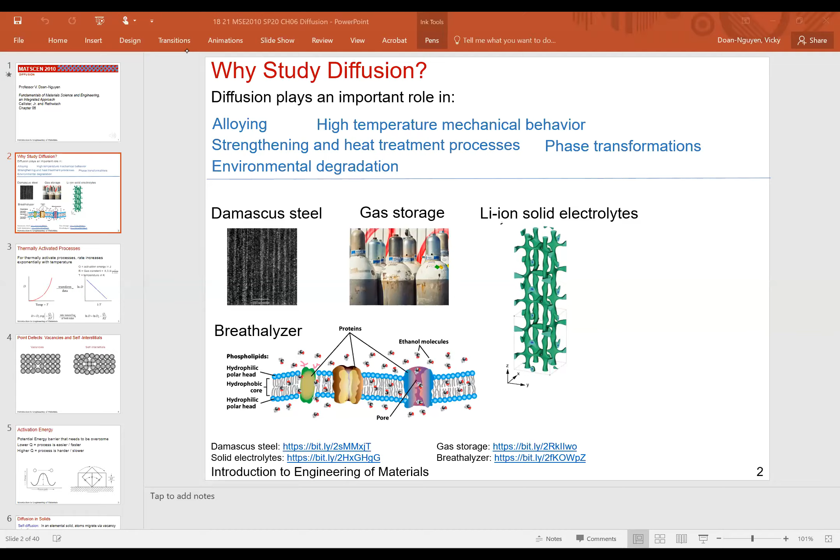Let's see, I'm going to duplicate my display. I'm not going to belabor the point and go through what Janet already talked about when she covered my lecture last week. I'll just go over the highlights, and then we'll do some practice problems together and manipulate the solution to Fick's second law as well as Fick's first law by solving a set of equations. I hope it's pretty abundantly clear that diffusion is basically in everything, in all materials processes that you will encounter as whatever engineer you are or will become.

Clearly bio applications are significant, there's a lot to say about breathalyzers and how accurate they are, but that's certainly a chemical process in terms of diffusion of molecules. Diffusion of gas molecules is also extremely important for everything we do, because we compress gas and also release gas outside, and that could have a major impact if, say, you're parked next to a building that has a lot of nitrogen from liquid nitrogen dewars outside. All that nitrogen coming out, if you park your bicycle with a metal frame for a long period of time, what do you think will happen when that metal comes in contact with all that nitrogen coming out?

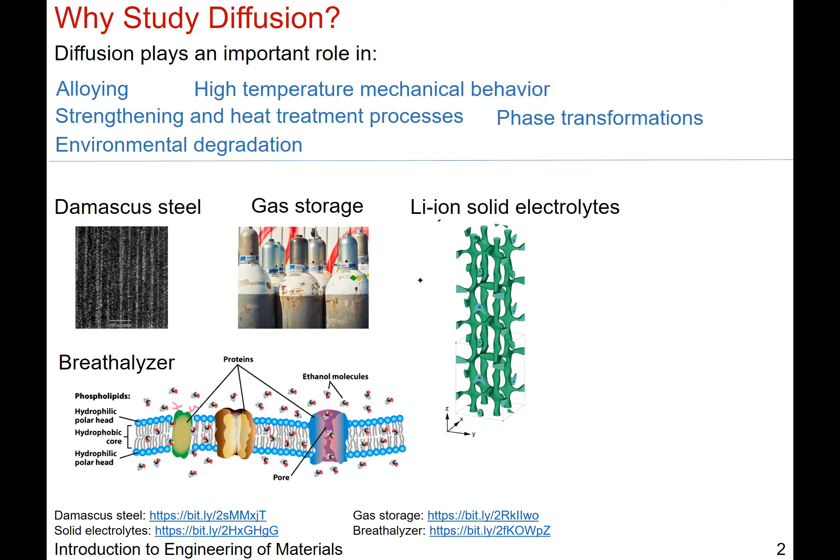So I am going to go to Fick's second law since a lot of you had concerns about that.

All right, this is the solution to Fick's second law. Basically, we're just saying we're not at steady state yet. Not enough time has gone by, and also we have an infinite solid. What that means is at this interface here, you have some concentration, okay? The CS, this concentration at the surface. And in this particular scenario, our boundary conditions for solving the partial differential equation is that you have some concentration at the surface that's going to be constant.

And you keep feeding the material, right? Your diffusive species, you keep feeding it so that your concentration at the surface is constant. So that's some CS. Your C-naught is the baseline concentration in your material.

So if you were a process engineer at Intel and you have a silicon wafer, and your job is to diffuse and control the process where you introduce phosphorus atoms into the silicon to make it an N-type semiconductor, right? If you keep feeding that concentration where the surface is some known concentration of phosphorus, that's when you would use Fick's second law for. If you were a process engineer and you just introduce phosphorus and then let go, take the phosphorus source away, and then you don't do anything, you just wait until the phosphorus diffuses into the silicon wafer, you don't use Fick's second law for this because the surface concentration is not the same, right?

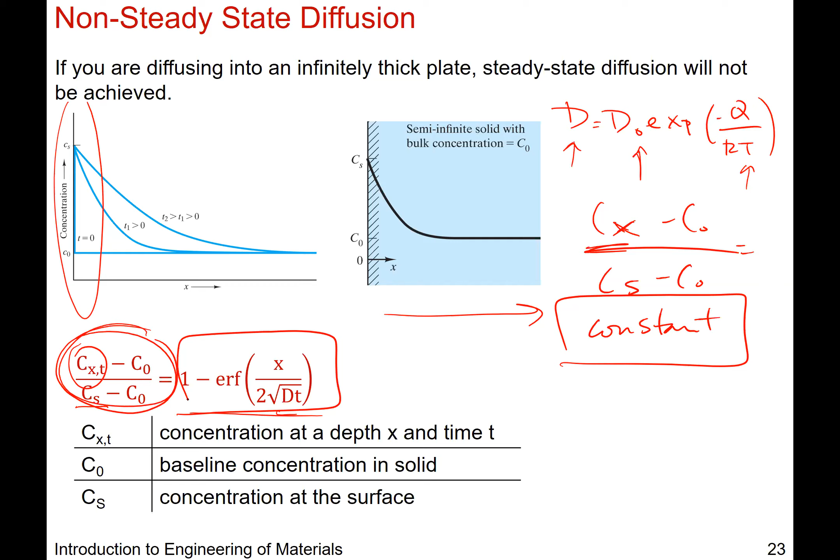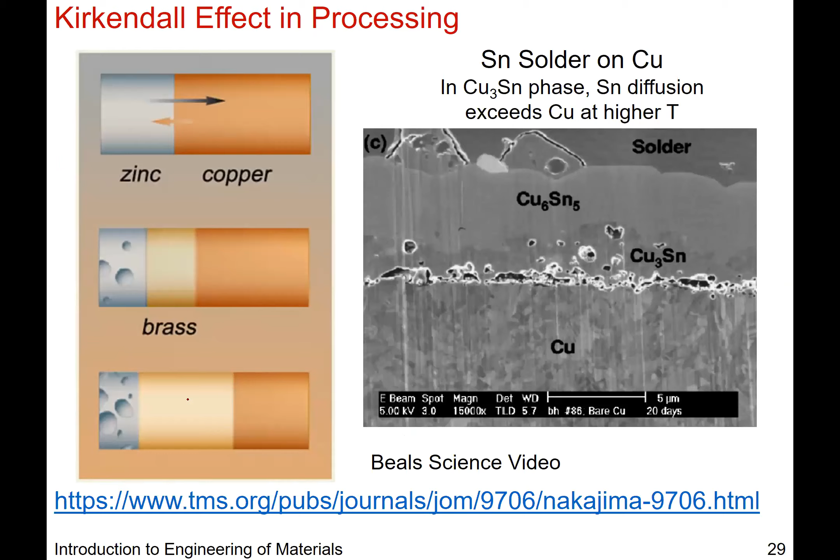So you asked me, what are those instances and how do I manipulate these equations? So let's get to that, and that might answer the question that Megan had. So let's see, okay, so this was the example - I'll get back to that. I'll also get back to the Kirkendall effect after I go through some examples. Okay, so here we go.

Here's the processing example. So instead of carburization, now you're putting copper into a bar of aluminum. We're assuming a semi-infinite source of aluminum, and copper at the initial concentration is going to be 0 because we haven't diffused any copper into aluminum yet. It says it took you 10 hours at 600 C to achieve some desired CX. So already you don't know what CX is, but you want to know how many hours it would take to get the same concentration if you lower the temperature by 100 degrees, going from 600 to 500.

So you're given a time, a temperature, and some diffusivity value, so you know you're going to have to use the diffusivity values given here. Just a reminder, rewriting the solution - your known concentration at the beginning in this semi-infinite slab is C naught, so that's just going to be 0, but it doesn't really matter because we don't even know what CX is anyway. And you're introducing copper at the surface, CS, and it's diffusing into aluminum.

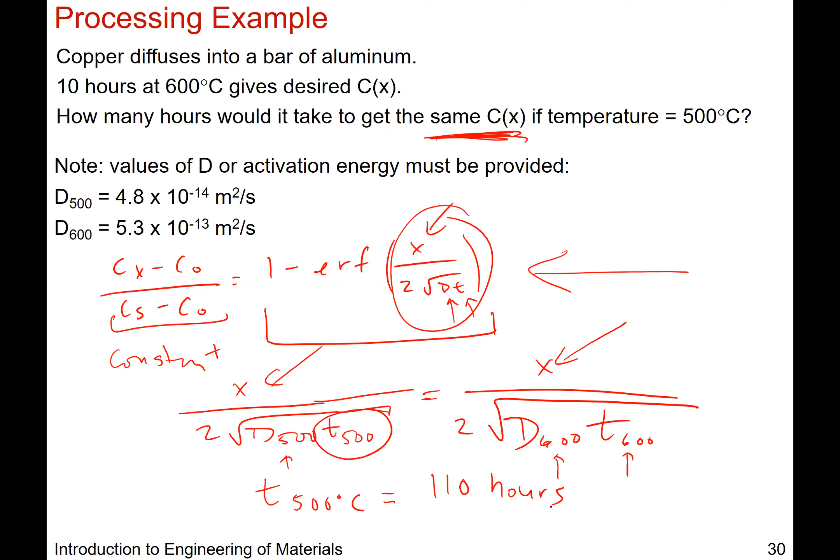Let me give you another example on how to manipulate the solution to Fick's second law by using the error function, but not solving for it explicitly. Okay, so let's see.

If you had something like this, where you have some sample - now we're back to carburization - it says that your sample of steel has been carburized at 930 degrees Celsius for 10 hours, and it has reached a depth of 0.04 centimeters. Now, if you want to continue this process so that your material is carburized out to 0.08 centimeters, or 2x the depth into your block of material, how much longer is it going to take you?

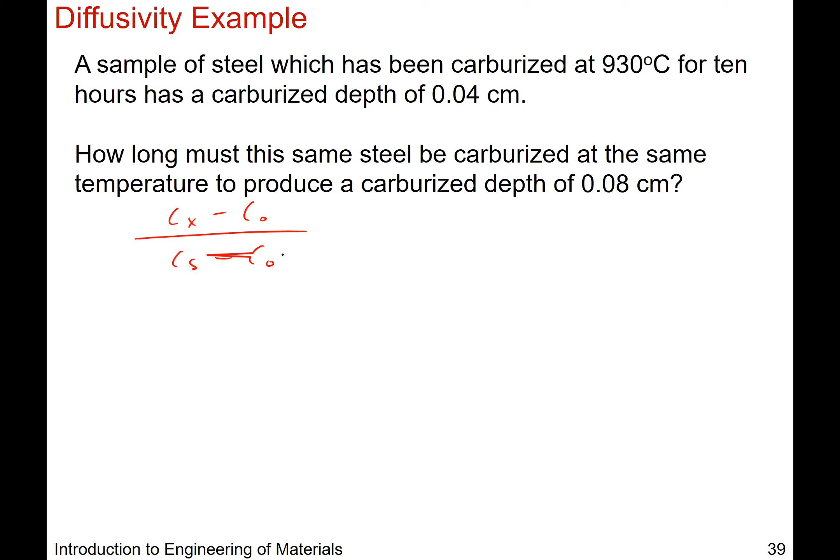Clearly, it's not going to be 2x because it's not a linear process, right? So now you can manipulate the solution to Fick's second law again. So you know that... once again, you keep on writing the solution.

It really wants to show you that video of the Kirkendall effect.

So we have that, and we're saying that our X's are changing. The depth at which we're carburizing this material is changing. So X is changing.

We're manipulating this again. X is changing, but is diffusivity going to change? No, we're at the same temperature. We're at 930 C, diffusivity is not changing, right? And why wouldn't diffusivity change? Well, right, what I was getting at is it's not changing because you're at the same temperature.

This is the equation that makes my statement valid, okay, for the most part. There's always an asterisk, but for the sake of this example, diffusivity is not changing.

And so if that's the case, then what we're really solving for is how much longer T2 is going to take if X is going to be 2X. So our diffusivity values cancel out because they're not changing, and the 2's cancel out too. We're solving for T2, the amount of time for 0.08, our X2 is 0.08 centimeters.

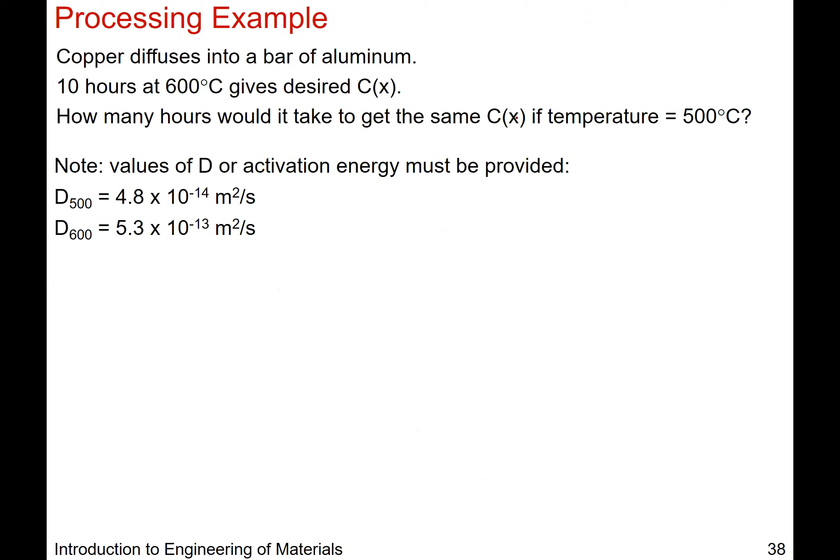Oh, that was a completely different example. This one was specific for copper going into aluminum. This is something going into steel—sorry, carbon going into steel. So it's a different example, a different case study. I could have used the same material, but I switched up the material case.

How did I get 4T? That's a great question—oh sorry, there should be a square root here. So square root of T1 was in there. Thank you for catching that typo. This is square root of T1, and this is also square root of T1, so I forgot to square it when solving for T2.

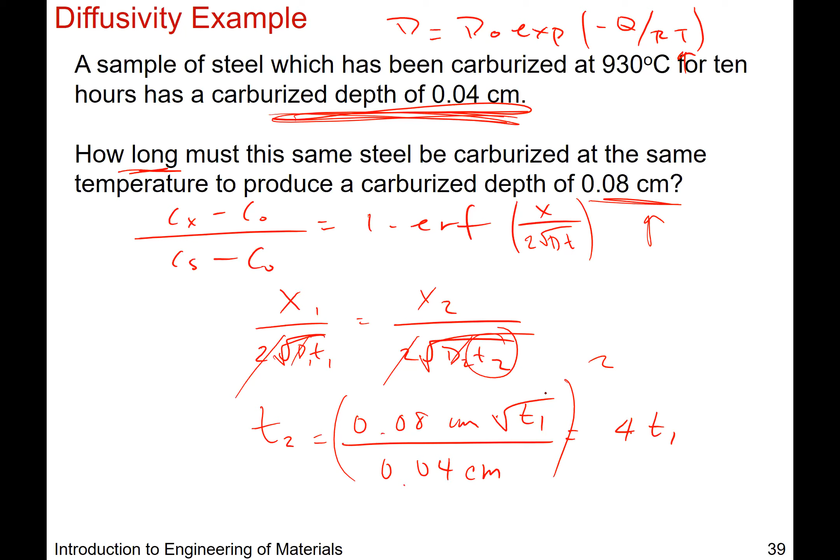Let's see if there's going to be another helpful example. Yes, there is. So when you're given an equation with some known conditions but some unknowns—like your diffusivity is unknown at a second temperature, or your rate is unknown at a second temperature, or you're solving for activation energy—you need enough information to solve for the new condition, and typically that requires a system of equations.

If you don't know the activation energy, you could measure the rate of something. In this example, I have the rate of oxidation for a material, and the rate is just some Arrhenius type equation: rate equals some pre-exponential factor C times e to the negative Q over RT. This is something we've been harping on, and you've also seen it for diffusivity, with some pre-exponential D naught.

So it's thermally activated. If you're given that the oxidation rate is 1.05 times 10 to the negative 8 kilograms per meter to the fourth per second at a certain temperature, and you're given another rate at a different temperature, how do you solve for Q? You have to solve a system of equations. You don't know the pre-factor—that wasn't given—and you don't know Q either.

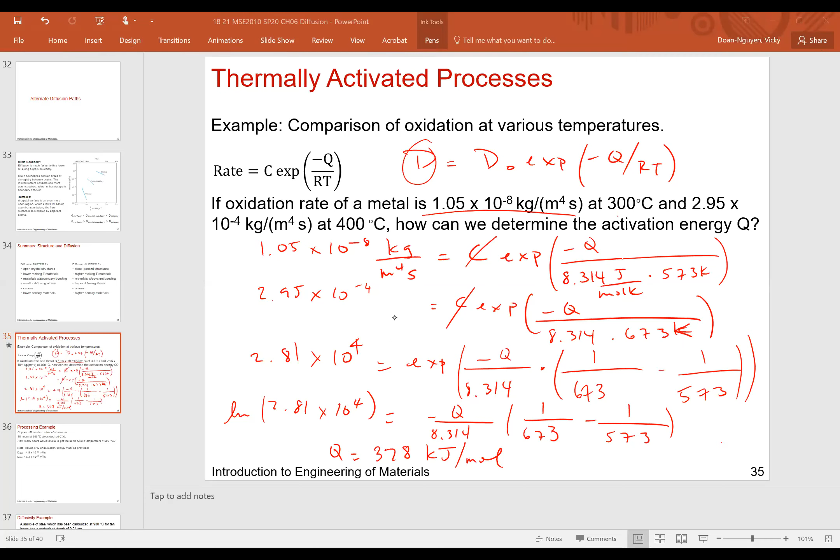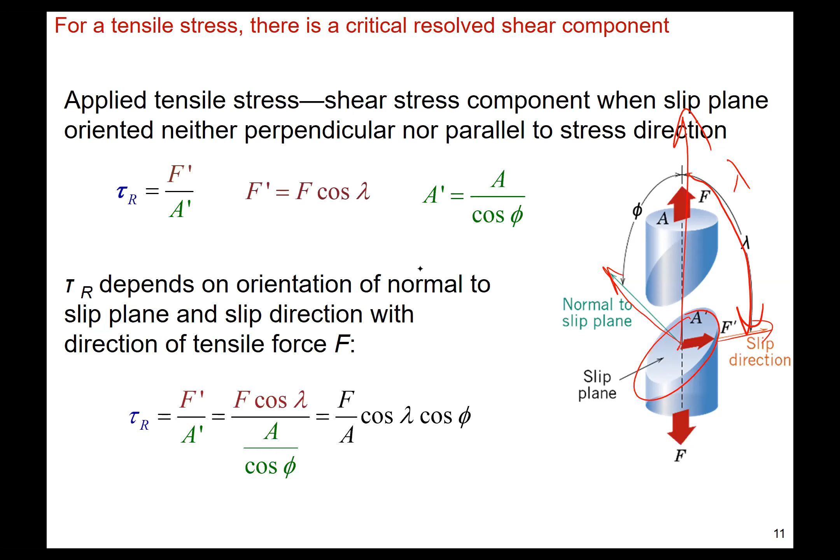So the slip direction—if you have a single crystal and apply stress at a certain crystallographic direction—what is the angle at which slip is going to be preferred? That angle is when the Schmid factor is maximum, so cosine lambda times cosine phi is maximum. That's going to be the preferred slip direction, as shown here.

So we worked out that problem. Now let's go to an example that illustrates that.

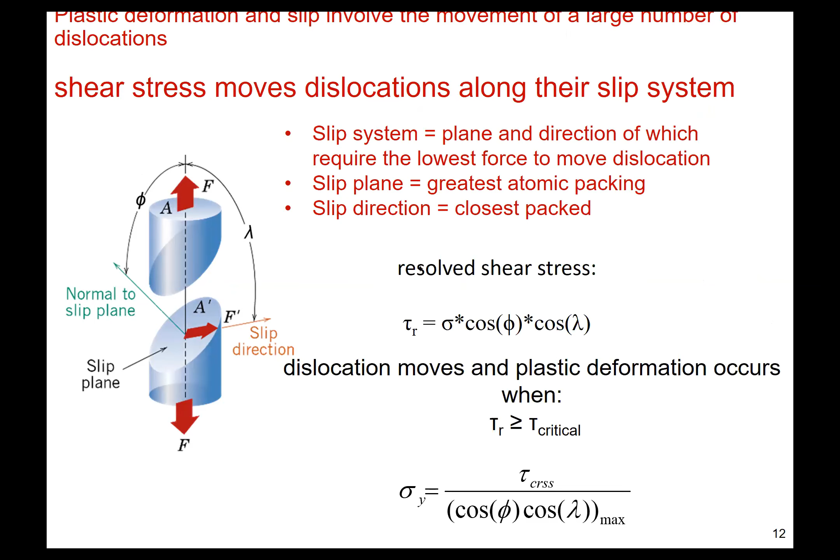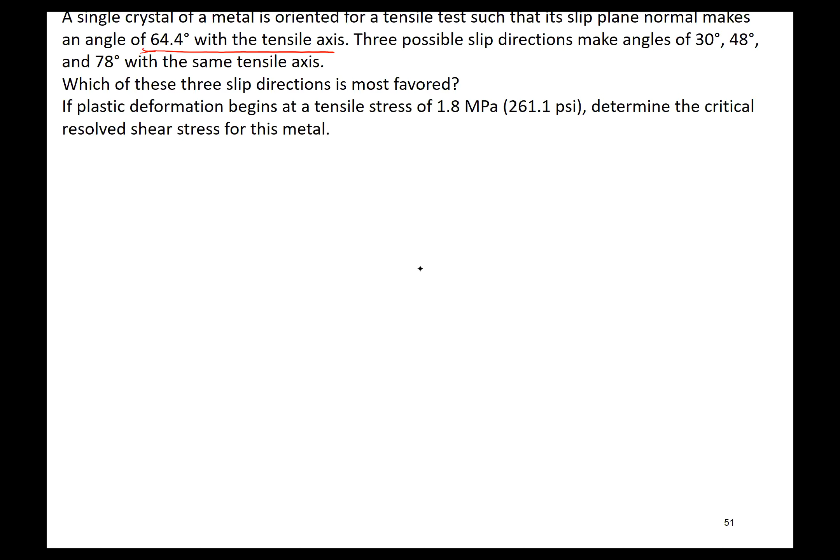All right, here's an example. I'll read it aloud so everybody can follow along. If you have a single crystal oriented so that the slip plane normal makes a 64.4 degree angle with the tensile axis, this is the direction of the tensile stress, and the slip plane normal phi is 64.4 degrees. You have three possible slip directions of 30, 48, and 78 degrees, and you want to know the preferred slip direction, where this is going to be maximal.

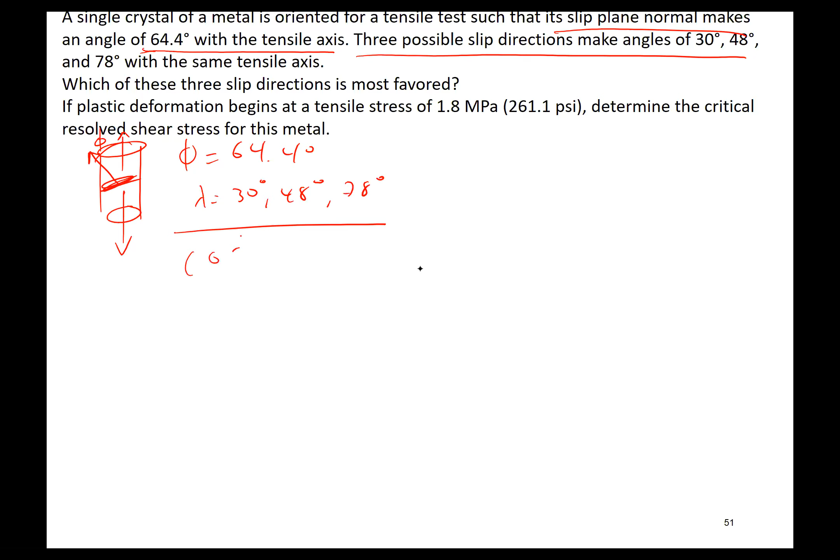If phi is constant, cosine phi is constant. What we're really looking for is the value of cosine lambda, and whichever is maximal will be the direction of slip. So you compute cosine of 30, cosine of 48, and cosine of 78 degrees. Clearly this is going to be the maximum, so 30 degrees is the slip direction that is most favored.

Then it asks: if you experience plastic deformation at 1.8 megapascals, what is the critical resolved shear stress for this material? The slip direction is 30 degrees and phi is 64.4. So the critical resolved shear stress comes out to 0.6736 megapascals.

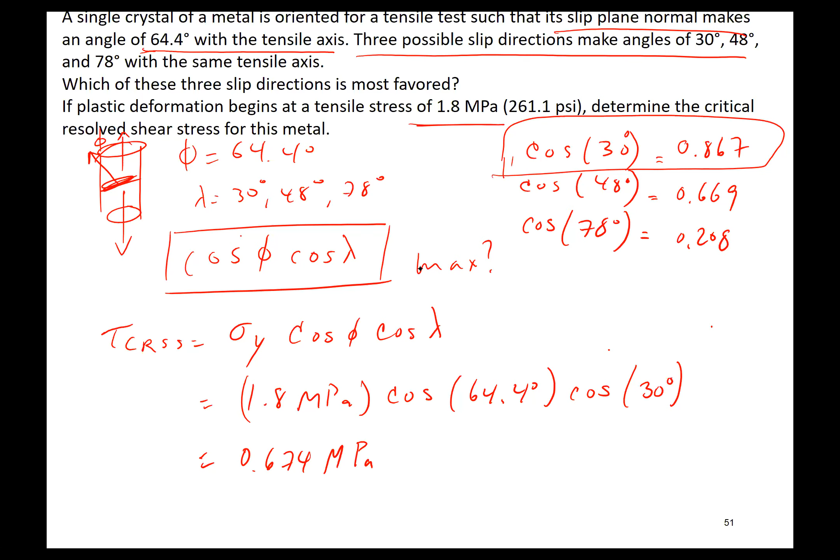The last example before we talk about the Kirkendall effect requires you to remember how to solve for the angle between two vectors. Here you have a single crystal of some hypothetical metal, could be vibranium—I assume vibranium is a metal, let's say it has BCC structure, sure why not, although I don't think we were ever told the crystal structure of vibranium in the movie. It's oriented so that the tensile stress is applied along the 1-2-1 direction.

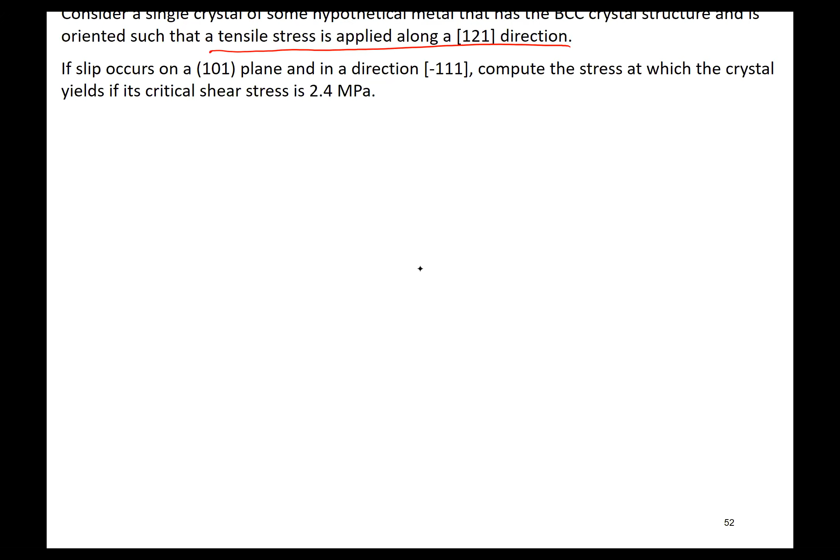So you have a single crystal again; this is the direction of your tensile stress, along the 1-2-1 direction. There's slip that occurs along the 101 plane, so let's say slip occurs here—this is the 101 plane, in a direction of bar 1,1,1. So the slip direction is bar 1,1,1.

We need to compute the stress at which the crystal will yield—we're solving for sigma sub y—given that the critical shear stress is 2.4 megapascals. This is what we're solving for. We need to know what phi is and what lambda is.

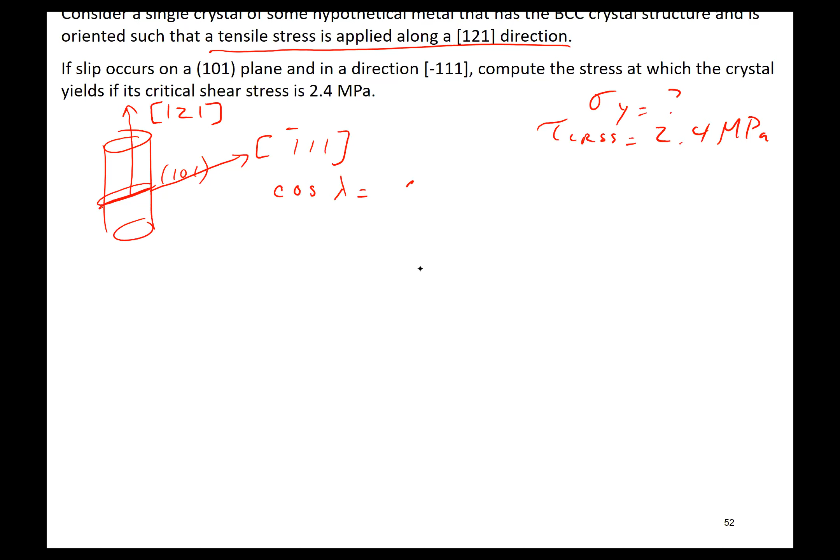If you remember, generically the way you figure out the angle between two vectors is the dot product of the two vectors divided by the magnitude of each vector times each other. That's just generically, so we're going to apply the same methodology to phi and lambda.

If we say vector 1 is the 1-2-1 direction, then the components are 1, 2, 1. The second vector is the bar 1,1,1 direction, and we're solving for lambda. So lambda is the arc cosine of the dot product: 1 times -1 plus 2 times 1 plus 1 times 1, divided by the square root of 1 squared plus 2 squared plus 1 squared, which gives you the magnitude. That gives you the angle between these two vectors.